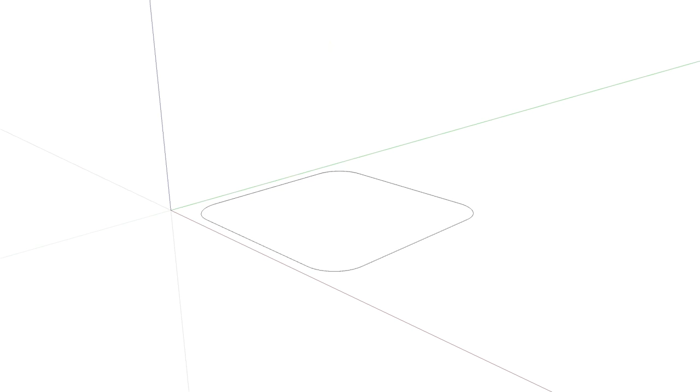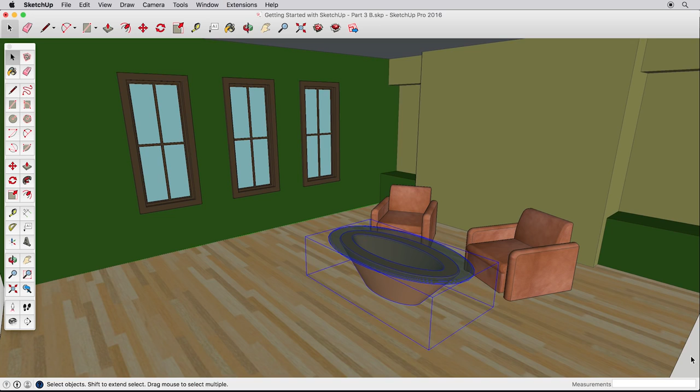In this video, we'll create an interior room, something that you may create to test out paint schemes or furniture arrangement. We'll build out the basic room, apply some simple colors, and then use the 3D warehouse to find furniture we can put in and arrange.

If you were creating your own space, the first thing you need to do is take some basic measurements of the size of the room, and where windows or other prominent elements are, to accurately recreate the space. We know how to draw accurately in SketchUp from the previous video, so for our example, let's begin by drawing a room that is 16 feet wide by 20 feet long, and push-pull it up 9 feet.

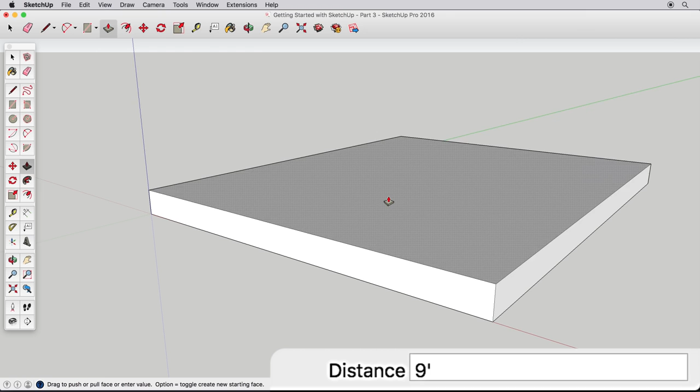When you're working only on an interior room, it's often helpful to erase some of the walls, and we can always draw them back in later. Using the eraser, erase this corner edge, which will delete 2 of the sides. You'll see the inside surfaces are a different color from the outside surfaces we've been working on, but it will have no effect on our example, and we're going to paint these surfaces anyway.

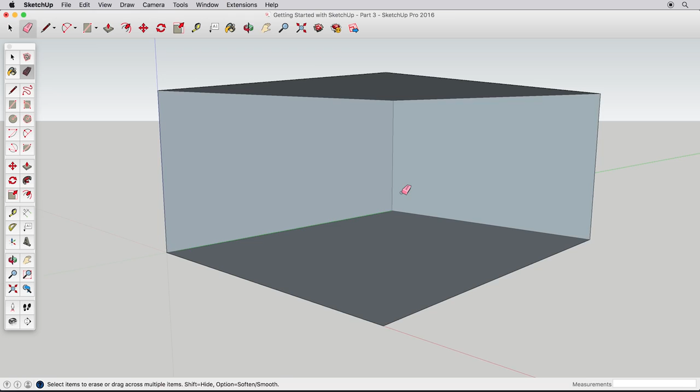Navigate to get a good view of this back surface. Now let's use a new tool to help us lay out some guidelines. The tape measure tool can measure between points in SketchUp, but it will also create guidelines that we can reference.

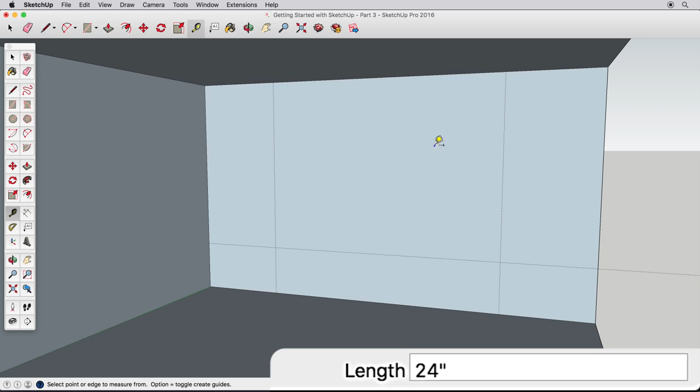Click once on this corner edge and start moving your cursor this way. Type 40 inches to create a guide 40 inches from that edge. Now, repeat this process from the opposite edge. Create a guideline that is 24 inches high, and a final guide that is 18 inches down from the top edge.

With these guides in place, let's add detail to our room by creating a built-in structure. Draw 3 rectangles using the guide intersections here, here, and here. Now we can delete our guides.

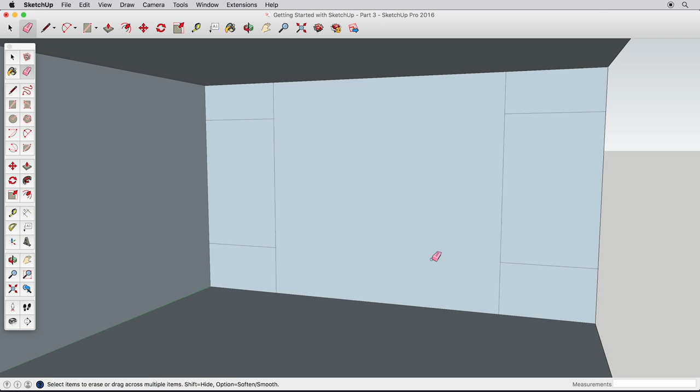You can delete guides with the eraser tool, but some of our guides are now hidden behind edges. You can see this by zooming out. Zoom out far enough to see all the guides and erase them. Or you can also delete all the guides in your model by going to the Edit menu and choosing Delete Guides. Navigate back into our room.

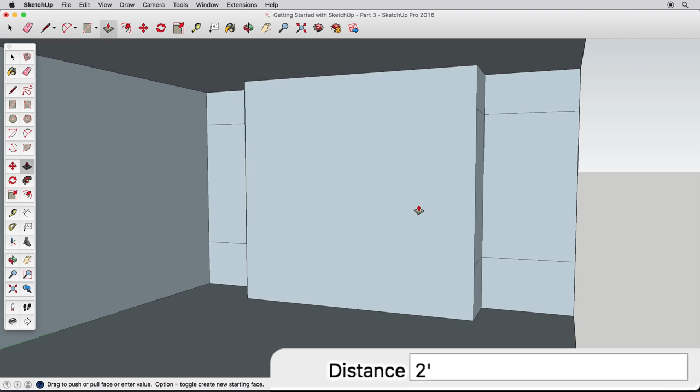Use Push-Pull to pull this middle surface out 24 inches. Now pull this lower surface out 18 inches.

We need to pull the far surface out 18 inches as well, but rather than manually inputting the distance, we can use inferencing. Click once with Push-Pull on the far surface to start pulling it and leave the surface with your icon. Watch how hovering over various surfaces will pull it out to match. We can simply infer to this near surface and click on it to finish.

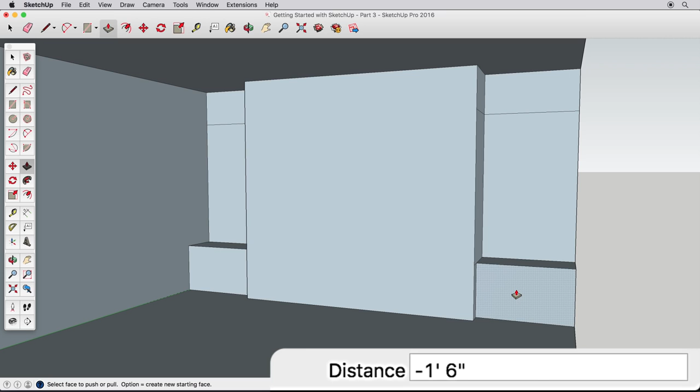Try again on these upper surfaces. Pull one out 12 inches, then pull the other surface out and watch how it will infer to the other surfaces. Remember, you'll click once on the first surface to start the push-pull, but you'll finish by clicking on the other surface. It's good modeling technique to keep your model clean.

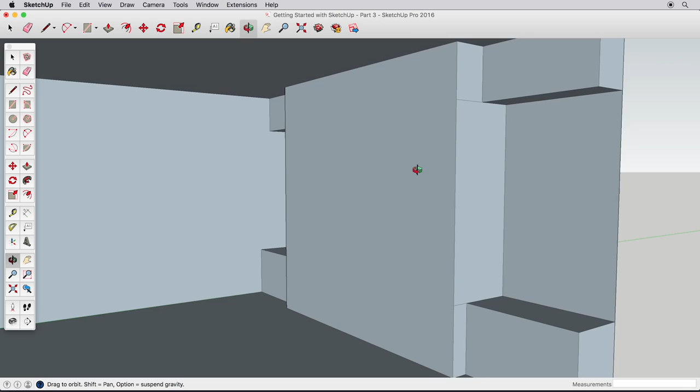Let's erase these extra edges created from our push-pull. Anytime you have surfaces that are coplanar, you can erase the edges separating them. This is called healing the surface. Zoom in if you need to erase the unnecessary edges.

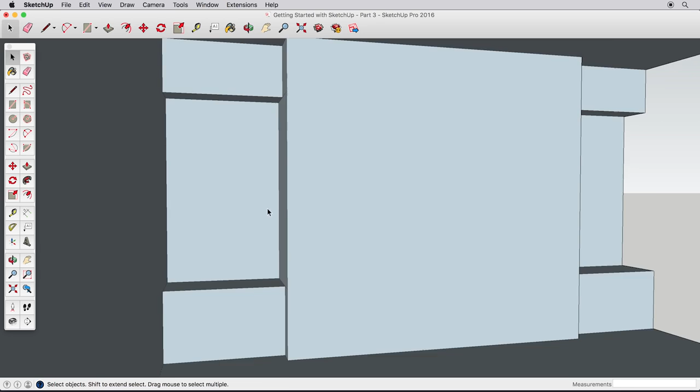We need to navigate to the other side and erase those edges as well. When you do, it's tricky to find the ideal view, and it's easy to orbit outside of the wall surface. Try this: navigate back to a full room view, and then choose the Zoom tool. Look down in the measurements box. It shows your field of view is 35 degrees.

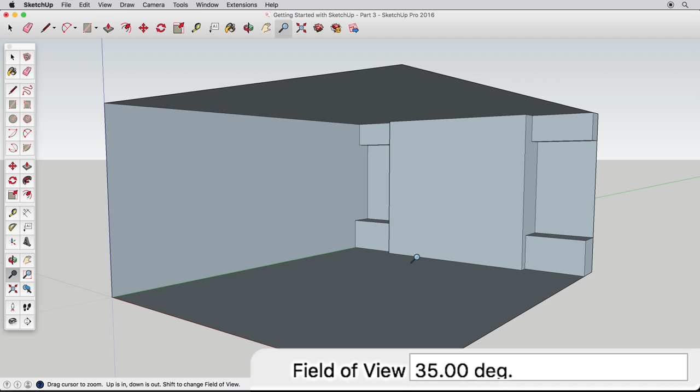You can change this just like changing the lens of a camera, allowing us to see more perspective in our view, which is particularly useful for interior scenes. Type 50 and press Enter. Now the field of view shows 50 degrees, and we have a broader view of our scene. Navigate back to the corner and find a good view to erase the extra edges.

With that done, let's turn our attention to creating some windows.

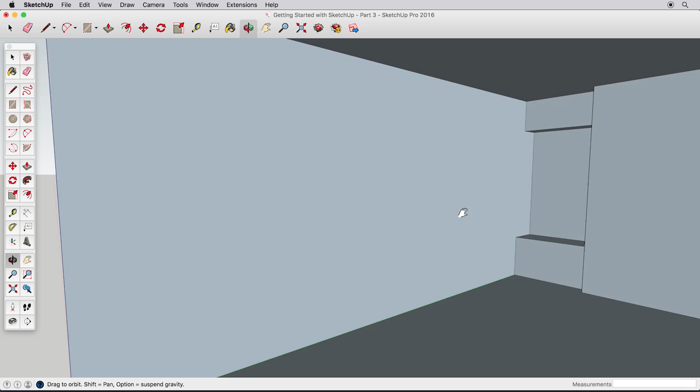Navigate to a good view of this wall and use the tape measure to create a guide 5 feet from the far wall. Create another guide 30 inches from the first. Now create a guide from the bottom edge, and infer to our built-in structure to finish it. Do the same from the top edge so our windows will line up with the other elements in our room.

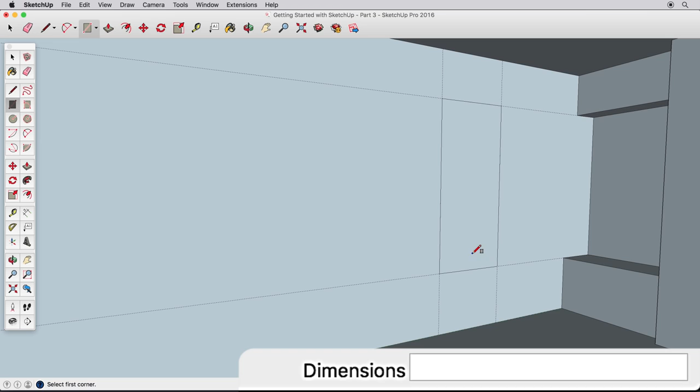Draw a rectangle using the guides for our window. Our room will have 3 windows on this wall, and they'll be 18 inches apart. Create a guide 18 inches from our new window.

Now select the new rectangle, then the Move tool. Move the rectangle from this lower corner and start moving it along the wall. While still moving the rectangle, press the Control key on a Windows machine or the Option key if you are on a Mac. This leaves the original shape and creates a copy for you to move.

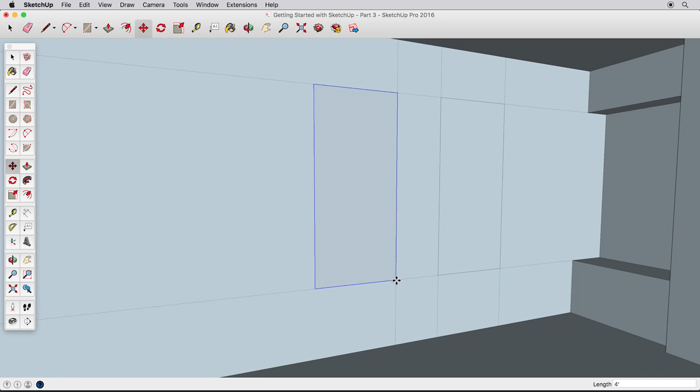Use the guideline reference to place the new rectangle. Practice this again for the third window. Create a guideline 18 inches from the new window. Select and move a copy of the window by pressing Control or Option on a Mac. And remember to move it exactly by moving it from a corner to a corner.

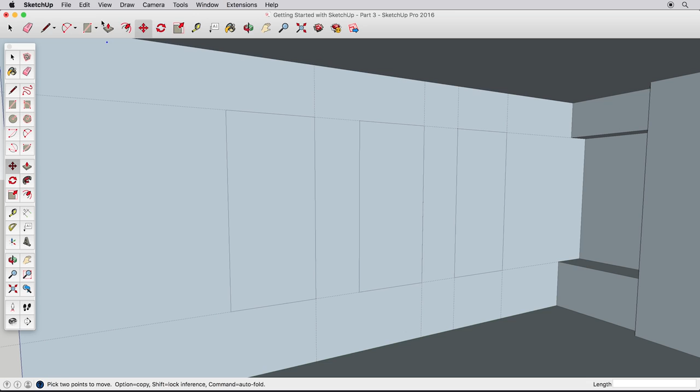We are finished with the guides, so go to the Edit menu and choose Delete Guides to erase them all.

To make the windows more detailed, we'll use the Offset tool and introduce some new tips to help you work quickly. Zoom into one of your windows and offset the surface inwards 3 inches. Then select the inner surface and offset it 1 more inch.

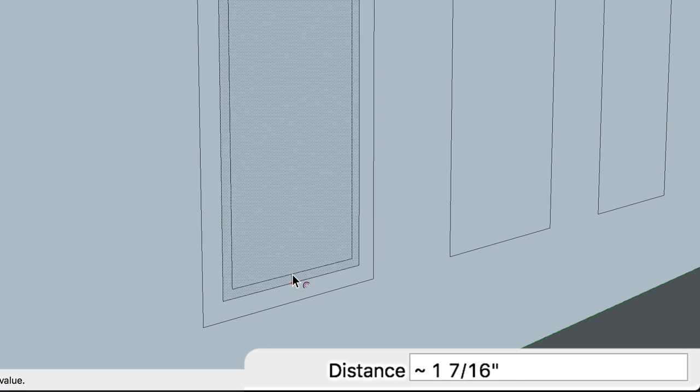Now, use the Line tool and draw 2 crossing edges from the midpoints of the inner surface. Finally, select one of the new rectangles created by the crossing edges and offset it in 1/2 inch for a window mullion.

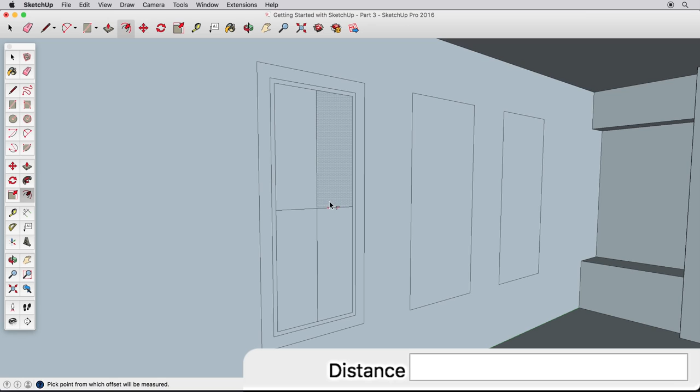SketchUp will remember the last distance you offset, so rather than typing in a value for the remaining window mullions, select another surface, then using the Offset tool, double-click on that surface. It will offset it the exact amount of the last offset. Try again on the 2 remaining rectangles. Select the surface, then use the Offset tool and double-click to quickly offset it by the last amount.

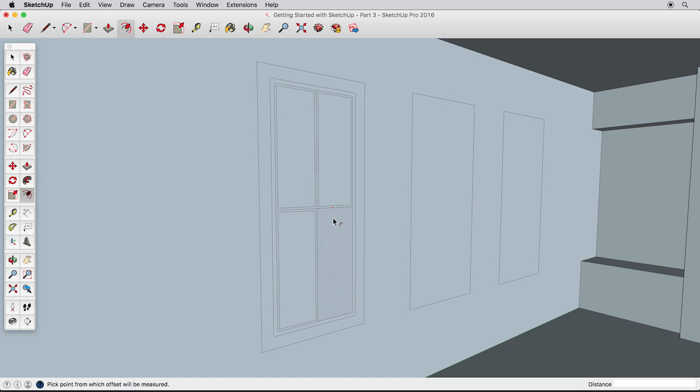Double-clicking also works with Push-Pull. Try selecting, then pushing one of the windows in. Then select a new window and double-click with Push-Pull on a different window. Continue this for all windows. Select the surface, then double-click with the Push-Pull tool to push it in the same distance.

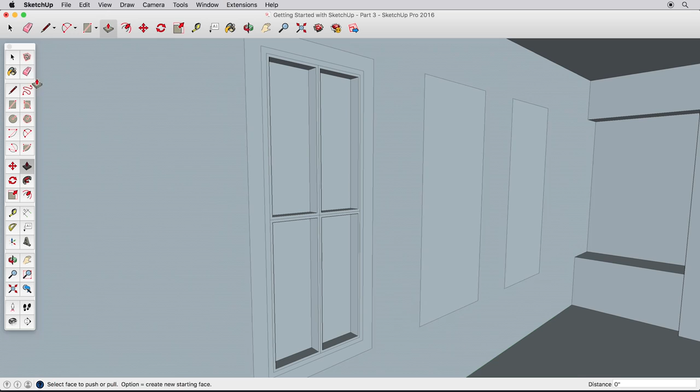To push the window mullion back, let's first zoom in and erase the crossing edges to heal this into one surface. Then push it back, and also pull the other surfaces in or out to create an interesting window and frame.

Now we need to repeat this process for our remaining windows. And because we've built one, we can use inferencing to quickly repeat the process. For example, I can offset this surface from this lower edge and infer to our completed window for the correct distance.

Although we are offsetting the whole surface, choosing the right edge to start the offset will determine which inferences are available to you. So in our example, we want to offset from horizontal edges to infer to parallel edges. Offset the frame, inferring back to the complete window.

Divide the windows with 2 edges drawn from the midpoints. Then offset one surface using this inference, and the remaining window surfaces by double-clicking as before. Use push-pull and inferences to complete this window so it's an exact replica of the first window.

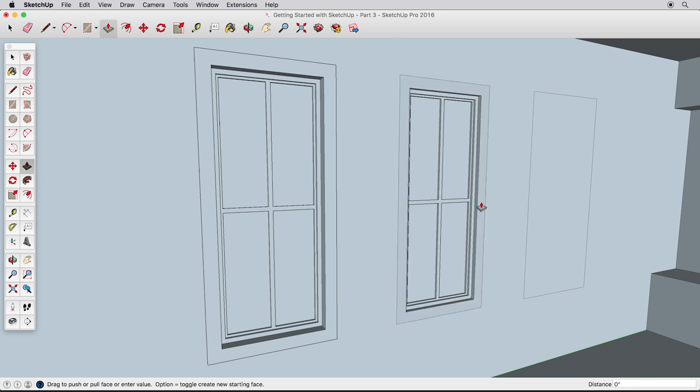This third window is available for you to continue practicing on. Repeat the steps we've taken to replicate another window. Of note, we are drawing these windows manually to practice these drawing techniques. But in our next video and other videos, you'll learn about better techniques for creating copies and repeated elements. But that is beyond the scope of this video.

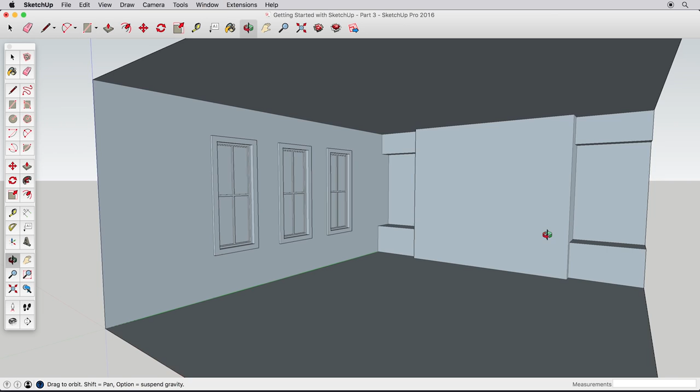At this point, our example has some interesting details, but color would help a lot. Let's apply some paint and materials. Applying color is one of the few tasks that is slightly different on a Mac versus a Windows machine, so we'll cover both. The basics are the same though. Pick a material and paint it onto surfaces in your scene.

Select the Paint Bucket tool to bring up the Color or Materials browser. On a PC, you're shown a default palette of colors to pick from, and on a Mac, you're given a color wheel to pick colors from. Choose a color, then click on a surface to paint that color.

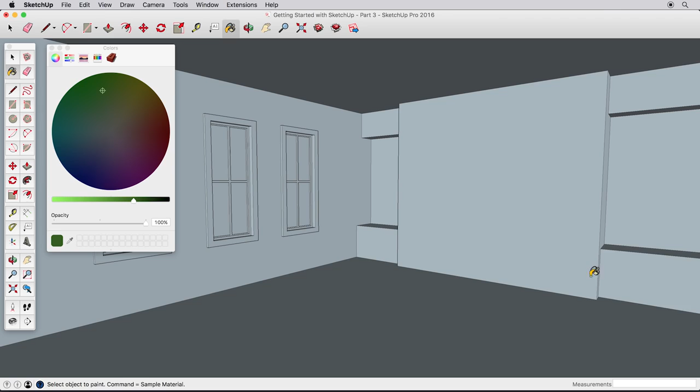Continue painting surfaces in your model. Pick different colors and try some various color schemes in your model. Navigate around as needed to get different sides for your walls, but don't paint the windows yet.

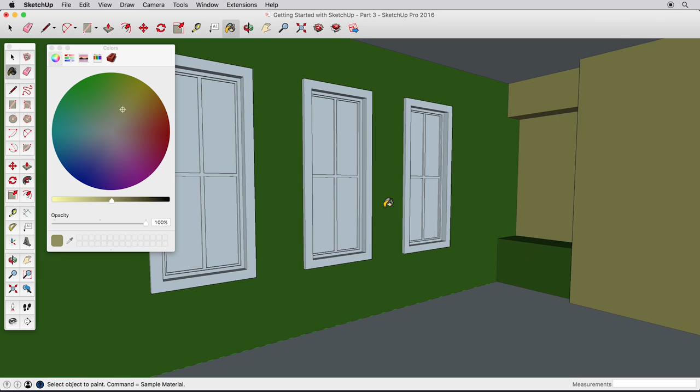For the windows, we'll introduce a tip to make the process easier. To start, let's pick a pale bluish color to represent the glass in the windows.

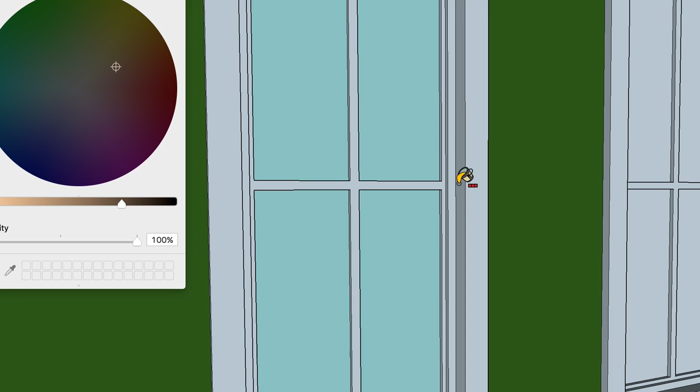The trim, however, has lots of little surfaces to work around and paint. Since our window trim is all still the default blue color, we can paint it all at once by holding the Control key on a PC or the Option key on a Mac. Choose the trim color, hold down the Control or Option key, and click on one window trim surface to paint all the connected surfaces of the same color.

With one window done, we can quickly complete the other two. However, we need the bluish window color again. With the paint bucket active, hold the Alt key on a PC or Command key on a Mac to turn the paint tool into a sampling tool. Then click on one of the painted windows to sample and pick that color for use. Now paint the remaining windows.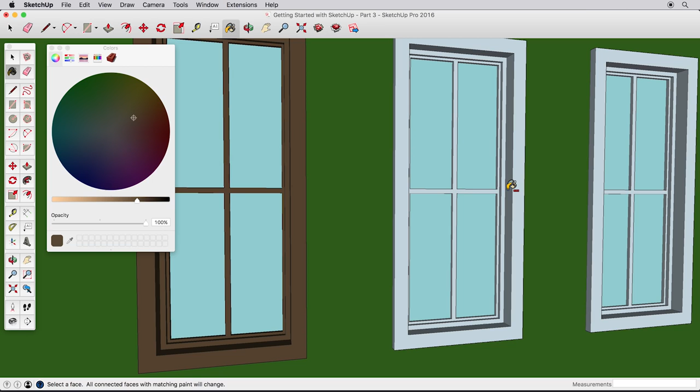Then hold Alt or Command again to sample the trim color. Then paint the remaining trim as before by holding the Control or Option key.

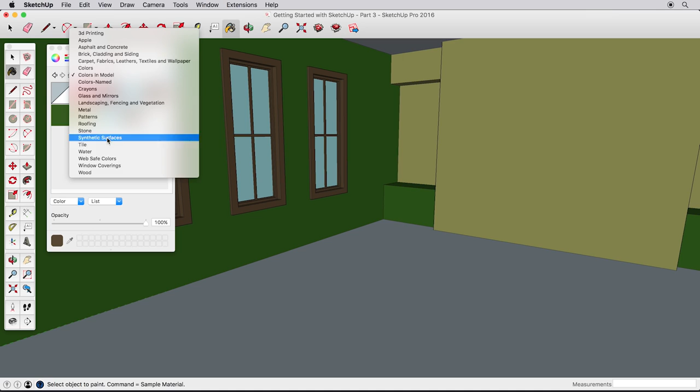In SketchUp, you can apply full textures and materials, not just colors. On a Windows machine, click the house icon to see what materials have been applied in your model, and open the fly-down menu to access textures to paint in your model. On a Mac, choose the brick icon to access additional textures. Paint some more materials into your scene as you'd like.

It's also possible to create your own textures to use in SketchUp. See our documentation for more information.

To complete this example, let's add some furniture from the 3D Warehouse, which is an online repository of millions of models where anyone can upload and share SketchUp models. As long as you're connected to the internet, you can search the 3D Warehouse directly from SketchUp.

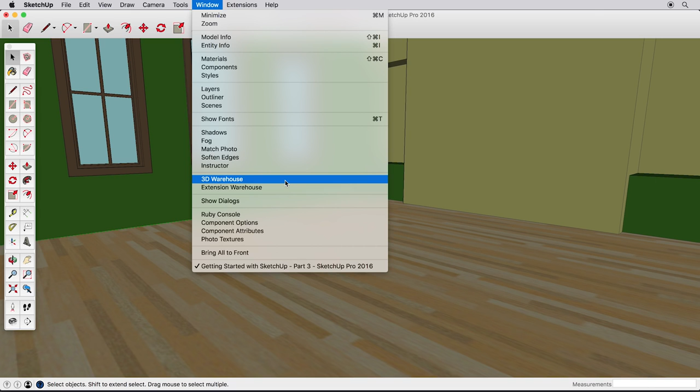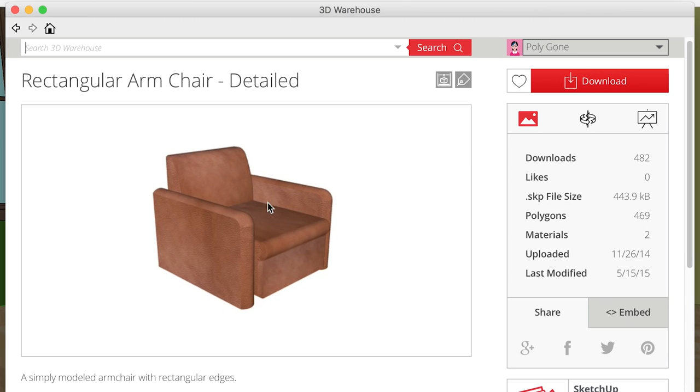Go to the Window menu and choose 3D Warehouse. From here, you can browse or search for any models you'd like. Searching for chair will return thousands of results, so be more specific to refine your results. Simply click on one of the results, then click Download to place it in your model.

With the new model in your scene, let's look at how to properly move it around the room. The chair is grouped together, and we will learn more about groups in the next video, but objects that are grouped can be moved and rotated like a single object with the Move tool.

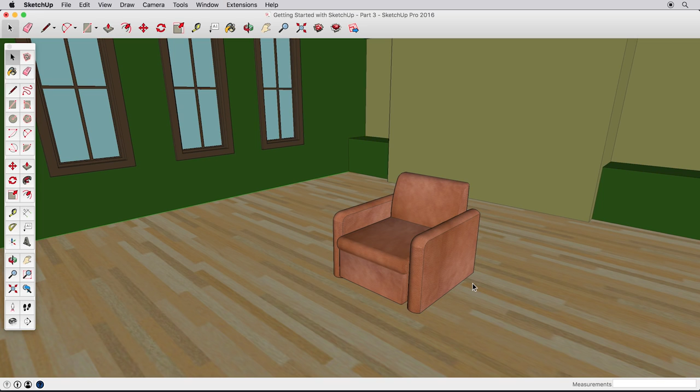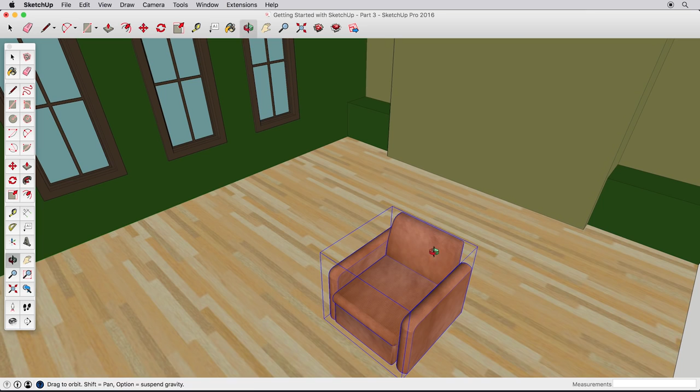Select the chair, then pick the Move tool and hover the cursor around the chair. There is a bounding box indicating the group, and small red points show up on the different sides. Hover over one of the red dots, and a rotation gizmo appears. Click on the red dot to rotate the chair in that axis, and click again to finish. You can rotate freely or in 15-degree increments by hovering the cursor close to the rotation gizmo.

Orient the chair as you'd like, and let's talk about moving it in your scene. You may want to move the chair over here, and suddenly it's buried in the floor. Probably not what you expected. Let's undo that. When you move objects in SketchUp, you always need to be aware of where you're starting and finishing the move.

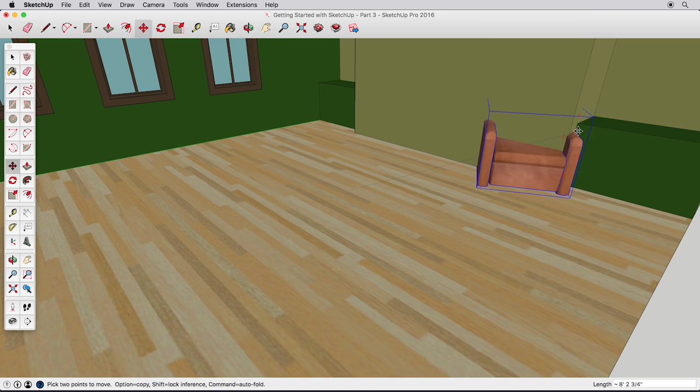For example, if I click on the armrest to start moving the chair, it will move that point to other elements in the scene that I hover over. To be sure the chair stays on the floor as I move it around, I'll move it from a point that should touch the floor. The leg corner, for example. Now I can move it easily to another point on the floor.

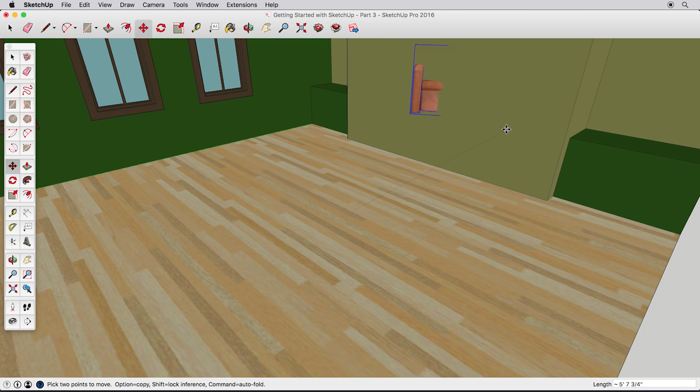Another way to quickly move it is by pre-selecting the chair. Then, using the Move tool, I can click on some point on the floor and move it to another point on the floor. Remember, though, that you started moving from this point on the floor, so you must move to another point on the floor. You could still move the chair up by moving it to some point on the wall. Always be aware of the red, green, and blue directions as well, so you don't accidentally move the chair straight up.

Remember as well that you can press the Control key on a PC or the Option key on a Mac to create a copy while moving the object.

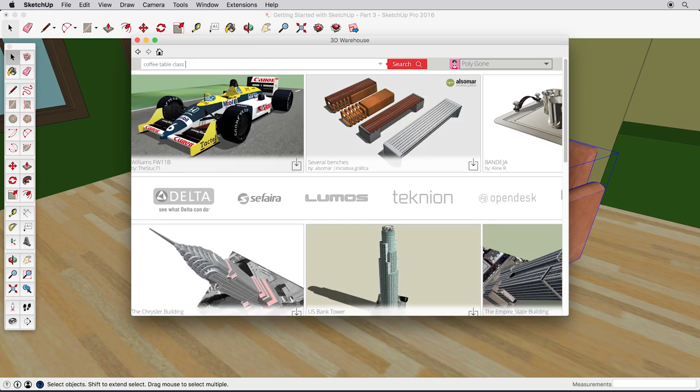Now practice by finding more items from the 3D Warehouse to add to your scene and placing them around the room. In the next video, we'll learn more about creating groups and copying objects by creating a small table.